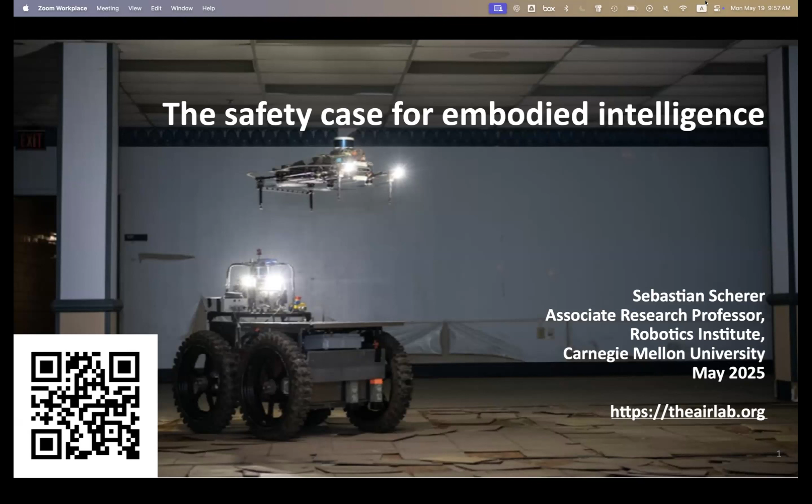Okay, cool. So if there are any questions along the way, I'll also try to answer them. I think you should be good time-wise. So I'd like to get you in a little different frame of mind, maybe, and see if that works.

One of the ways we typically handle uncertainty in the world is to try and add structure. If you think about autonomous driving, like the previous speaker's example, flying, all these things, you're trying to add structure that removes uncertainty, that increases reliability in the system.

So the cases that I'm excited about are cases where there's a lot of uncertainty. Imagine you're in tunnels, you're off-road, all of these situations - you're essentially removing structure, and now your system has to be able to handle these situations, and that's a much harder case and requires your system to have more autonomy rather than automation.

Just to put this in context, here's an example from the DARPA Subterranean Challenge a couple of years ago. The robot had never seen this environment. Here we're flying into some smoke.

And so in that smoke, the system has to decide, hey, my SLAM system is getting bad, I have to get out of the way. The drones here have to be fully autonomous.

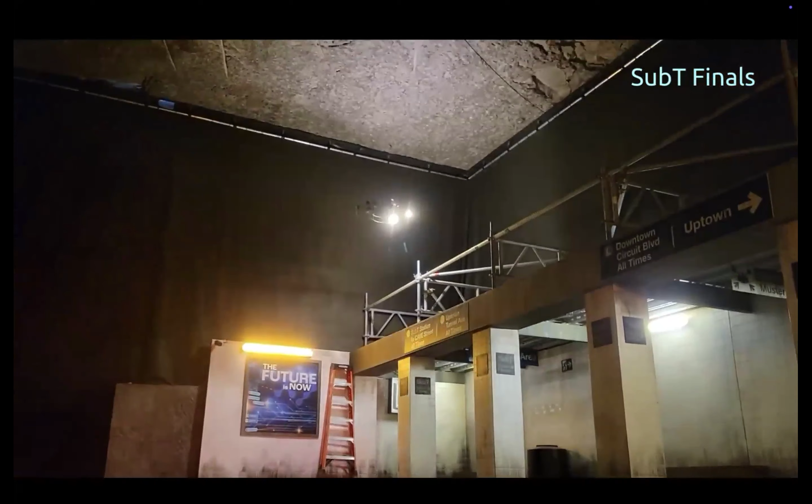There's no operator, so you have a team of those flying around because the drones are actually out of comms - it's inside a cave and it's really hard to have communications in there. So they have to just go out there, do their thing, and then come back.

You can also see that the robots have to handle quite a wide range of situations. For example, here you have some big open caves, narrow hallways, and so your algorithms have to kind of generalize for these situations.

Now here you can kind of see some of what's happening under the hood. So it's basically building this map, deciding to plan. Here it's lining up to try and fly through a door, for example, and then explore the space. So the high-level goal is exploration.

Here we're flying inside a cave, so it has to basically handle flying in these kind of dusty situations. And the robot has to be quite aggressive to be able to get into these narrow spaces, to be able to find people, find objects, and so on.

So a lot of what's going on under the hood here is not the focus of the talk, but I just wanted to get you in the frame of mind of how do we, if we're in this kind of situation, think about safety, and how do we, in the end, have guarantees for these systems.

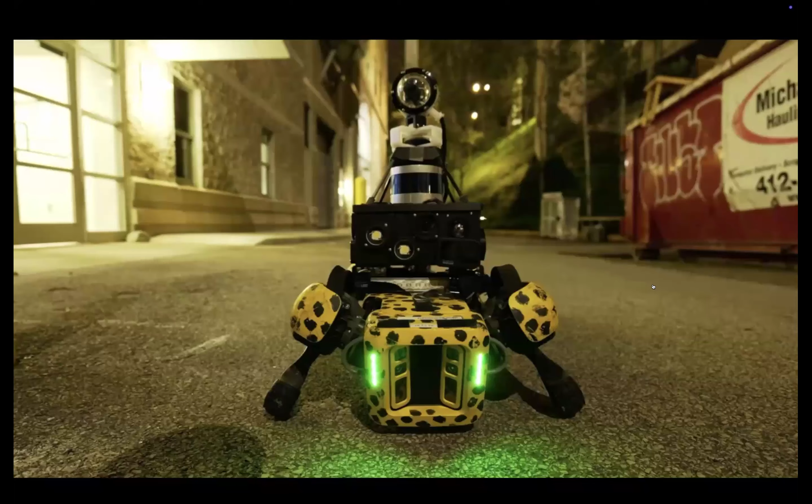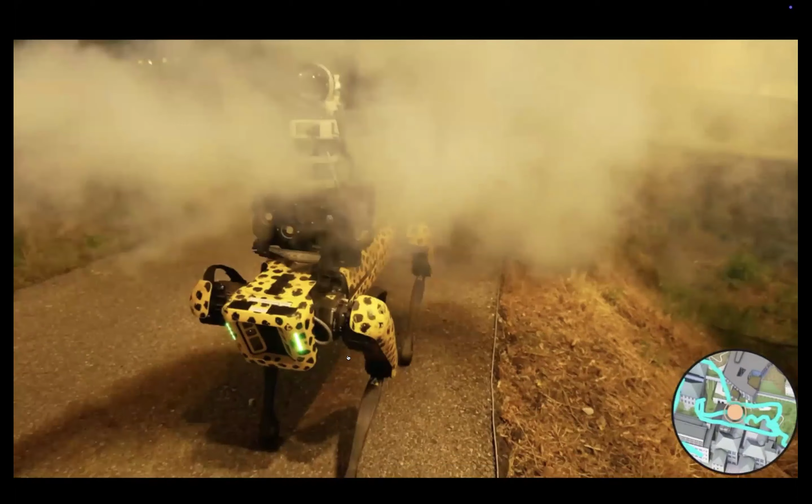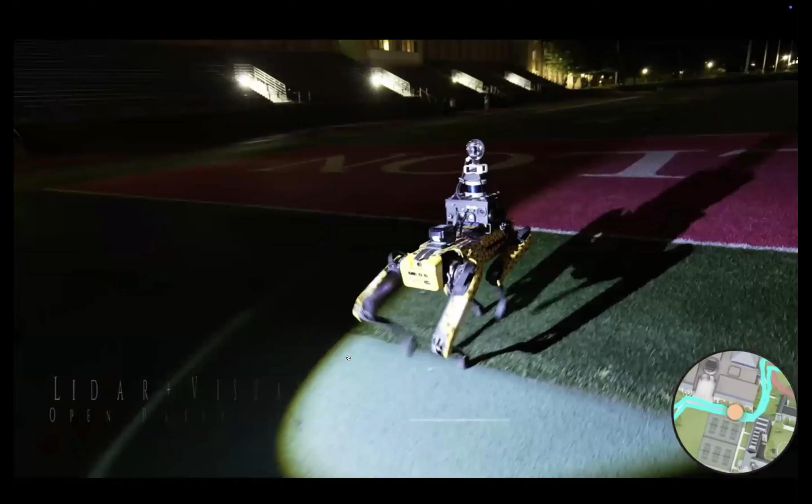Another example of what you can do with this type of data: if you have these known unknowns, we can model the uncertainty. Here we're deliberately degrading our SLAM system, using only the LiDAR even though it has more sensors. In this case, the fog was so thick it didn't have any LiDAR data, so it falls back to the IMU. It's really about having a good sense of uncertainties so you can use those uncertainties to build a good SLAM system.

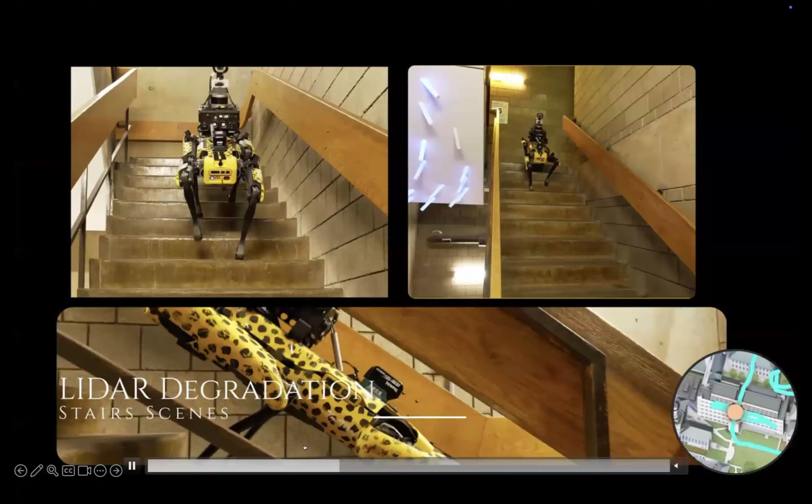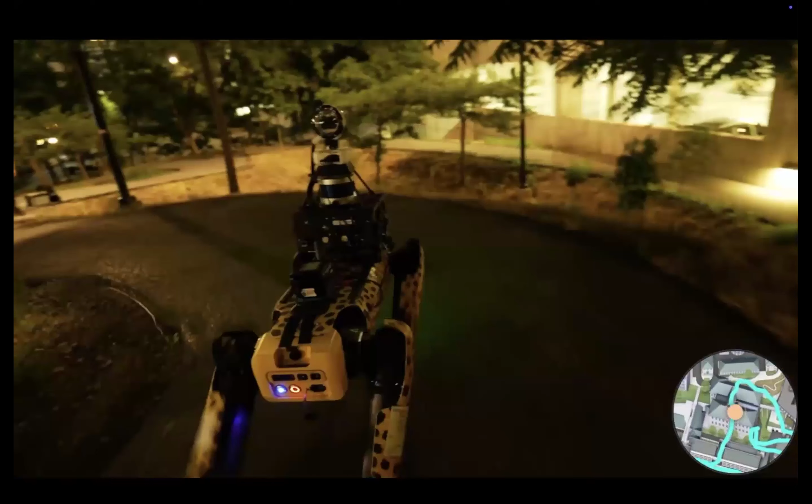Another situation occurs here on these stairs—a kind of partial degradation, with narrow spaces where you don't have enough constraint, and the gears here in the background. With narrow spaces, your LiDAR isn't enough constraint to do good state estimation, so you have to trade off between the IMU and the LiDAR. This is the kind of output you get when you do good modeling—there's no loop closure here, this is just odometry. We actually just recently open sourced that method too, if you're interested—you can play with it.

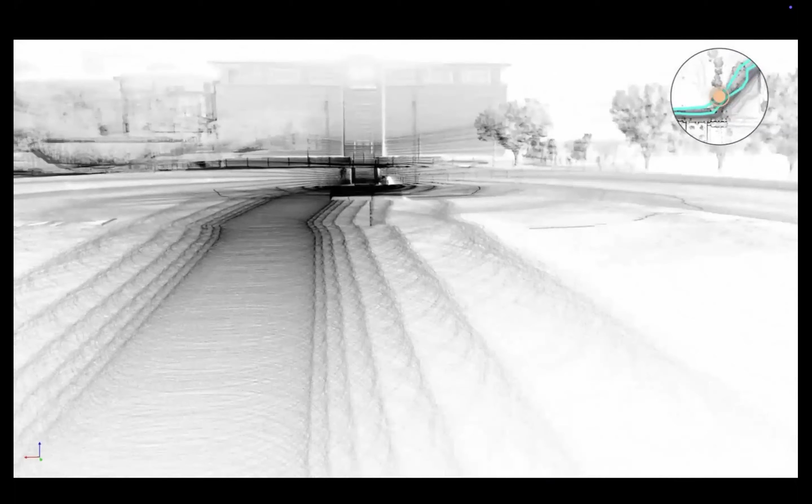Just to give you an idea—yeah, the video is a little choppy here. We might just quickly stop and try to see if I can share. I think I might have to click the video button.

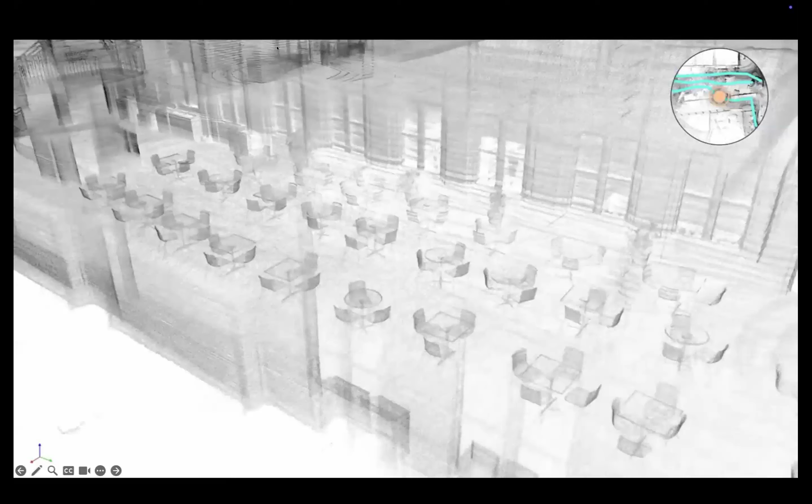So to get a sense of the type of map that we can create, now you know what happens at CMU campus at 2 a.m.

Here's just another example for a similar idea. So here you have LiDAR, visual plus thermal, and so you have to be able to have a good uncertainty estimate to be able to trade off these different modalities.

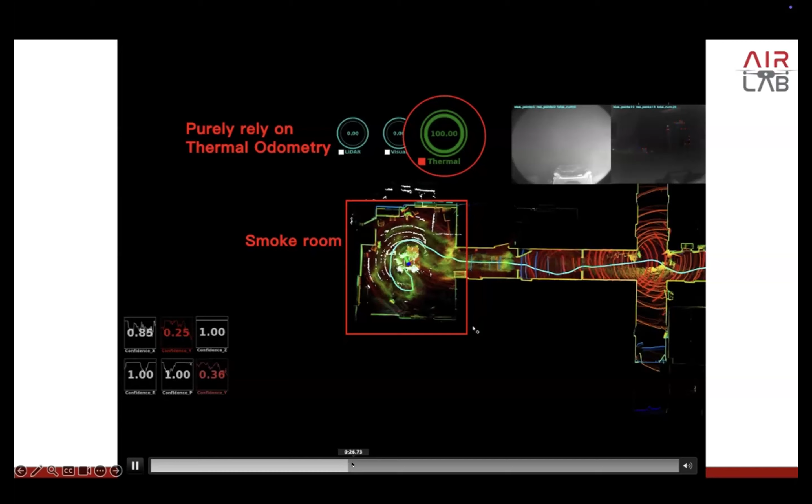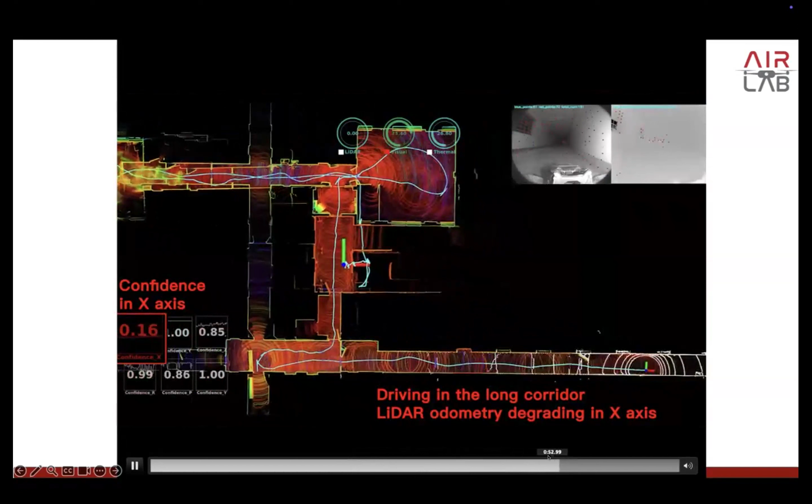Here we're going inside a smoke-filled room. The LiDAR does not work, it only uses the thermal camera, and the visual doesn't work. So then it basically goes back to LiDAR odometry, and then here it goes inside a hallway that's very narrow, so then it switches to visual odometry. So you can kind of get these trade-offs, and that's what you can do when you have known unknowns.

So you can do a lot of this uncertainty distribution. Let me give you some other recent things that we've looked at.

IMU odometry, so no other sensors. And so here the idea is, again, we can use a lot of this uncertainty estimate to make our algorithm better. I'll maybe do a little quickly here, but the idea is to say what we saw in a lot of this prior work, so a little context switch just mentally.

In this setup, we only have an IMU, and we're trying to integrate it to do odometry on a drone. And so typically this is difficult because on a drone, we don't have things like steps or zero velocity updates to help you.

And so what we had seen in a lot of the prior work is that it would try to get accelerations in the global frame and take out gravity, and then try to learn this motion model. And actually, that is not a good idea because you lose.

So prior work had looked a lot at this kind of global estimation, just in a global frame trying to integrate. Instead, what we just changed is to body frame. Not very complicated, but it actually makes a huge difference in terms of what you end up being able to learn.

For unknown unknowns, we want to be able to degrade gracefully in out-of-distribution scenarios. Here's one example of work we did: in an autonomous driving situation, if you have some fancy network running a planner, we want to say, hey, if you're in an out-of-distribution situation, you'll fall back on a more classical method.

So what we want the system to do is learn a predictor that predicts higher pseudo counts, or confidence, in in-distribution situations rather than out-of-distribution situations. In out-of-distribution situations, we want to weight this rule-based planner more. If you look at the results, when in distribution, the rule-based planner and the IL planner — imitation learning planner — have different actions, but it trusts the IL planner more than the rule-based planner, so the results look good.

We switched to Singapore, which the system had never seen — this is a bit of an extreme example. You can see the learned system performed very poorly, completely out of distribution, on a different side of the road. So the rule-based planner effectively takes over, and you get the performance of the rule-based planner, which might be less than what you'd get if you had more training data with your system, so you can see.

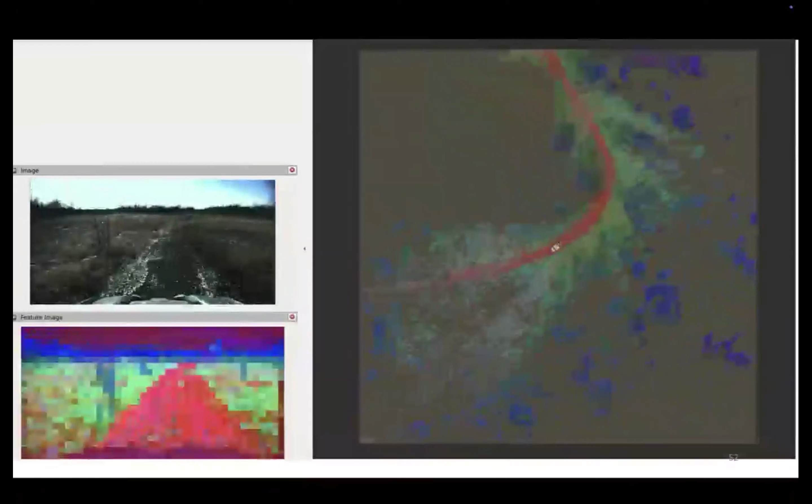So this is kind of what the features look like that we create when we build this kind of map. This is the input to our system, basically, that it learns from — this is a PCA on some foundation model features that we use for driving.

And then we learn in that setup, we then take those to IRL on a lot of behavior of what we see. We also build these speed maps based on roughness.

So this is self-supervised. The system basically looks at the IMU and determines how rough the area is that I'm driving through. And if there's a lot of roughness, then you want to drive slower, so it tries to match that, and that works quite well.

And then the uncertainty estimation is how much out of distribution.

Now, one of the things that will happen is that we know we'll not be able to handle all these cases, so we want to be able to learn on the fly. We're basically, as we run the robot, running some estimator to try and refine that system. And since we have the uncertainty, we can refine the cost estimate.